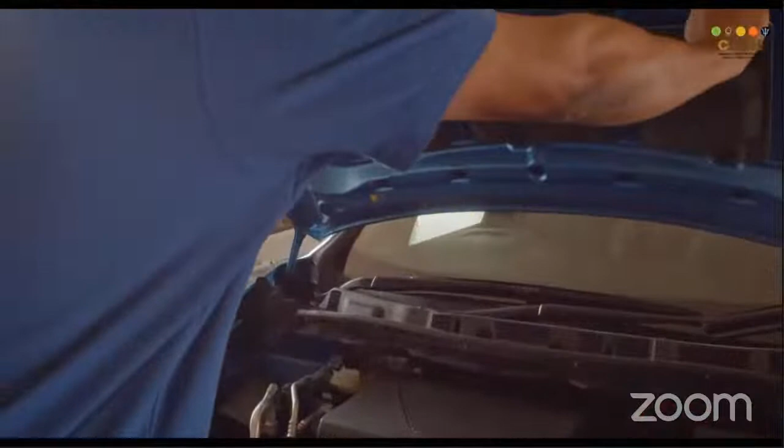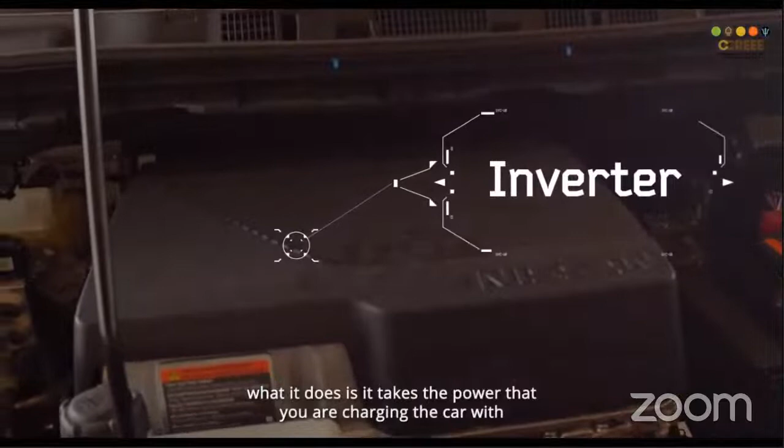Nothing changes for the vehicle from a hood standpoint, but this is a typical 12-volt battery. This battery operates your auxiliary systems - your radio, your dashboard lights, your headlights. What looks like an engine is actually a main feature of the car. It takes the power that you're charging the car with and converts it to DC, going from an AC supply into the battery. Then when it leaves the battery, it needs to become AC again to drive the motor. So a lot of the features in the car, compared to an ICE vehicle, are the same - it has a lot of good features.

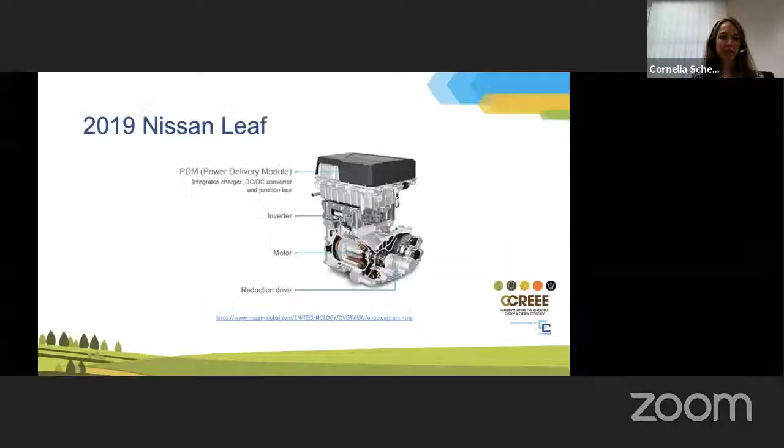You'll have seen where I lifted the hood of the car to show this part that looks like an engine in an internal combustion engine. This is a cutaway from a Nissan Leaf. The top part you'll see when you open the hood is the power delivery module, which integrates the charger, DC/DC converter, and junction box. Just below that is the inverter that normally feeds the motor - you can see the motor is right there, very compact, and it's connected to the shaft of the car wheel. It's a very innovative way to design the car as it relates to the features that propel it forward.

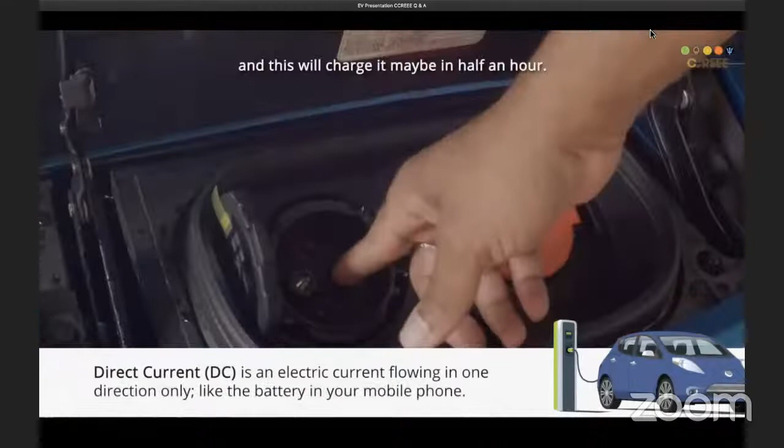Sure, I'm just going to do a little charge now, just top it up a bit. Right in your house - you can charge it right here? Yep, so I just open the latch of the cable. This one is a fast charge, which is direct current, and this will charge it in maybe half an hour. This is your AC port, from the household or from a public charge, and that will take a little longer to charge. This one is the one I'm going to be using.

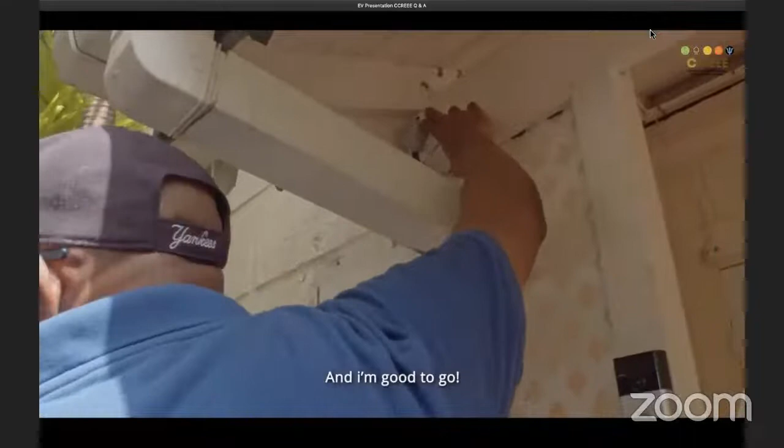This one takes how long compared to the... well, it depends on what type of charging infrastructure you're plugging into. If I have 20% to charge, just to top it up, it could take 8 hours. So while you're sleeping? Yeah, exactly. So here in a Barbadian context, do you have to adapt for that voltage? No, they just take the power from the panel and the electrician puts this 220 plug here. I plug it in, turn on my little panel switch, and I'm good to go. I go to bed, in the morning it's finished - take the cord off, put it inside, and I'm good to go.

And then I send it, and that's it.

In the office, we have a more advanced charger. For this particular charger, you have to have your own cable. Cables will come with the car, so you may have different cables for different cars—you'll definitely get one with the car. Once you get the cable, you'll need to know what your charging infrastructure is like, and decide if you need an adapter for that infrastructure in your country. You have the latch here, so we open the latch and then plug this in.

This particular charger is more sophisticated. It could charge as low as what you'd get at home and go up to at least 32 amps, giving it a faster charging rate. This charging station comes with a cable. This is a type 1, and this connection is a type 2. This one is typically US or Japan market, and this one is typically the European market.

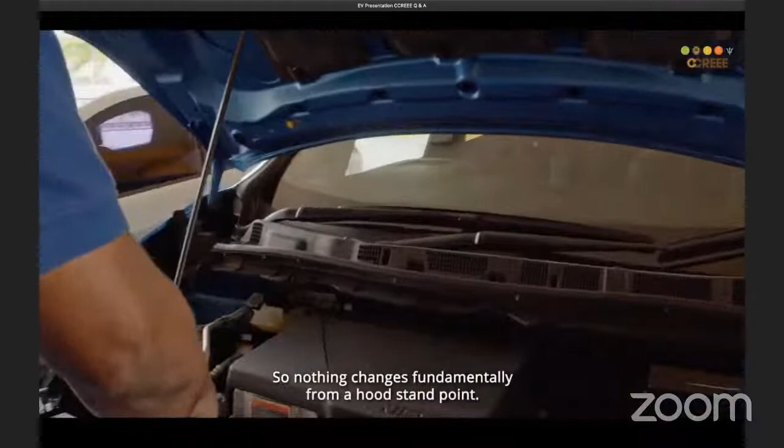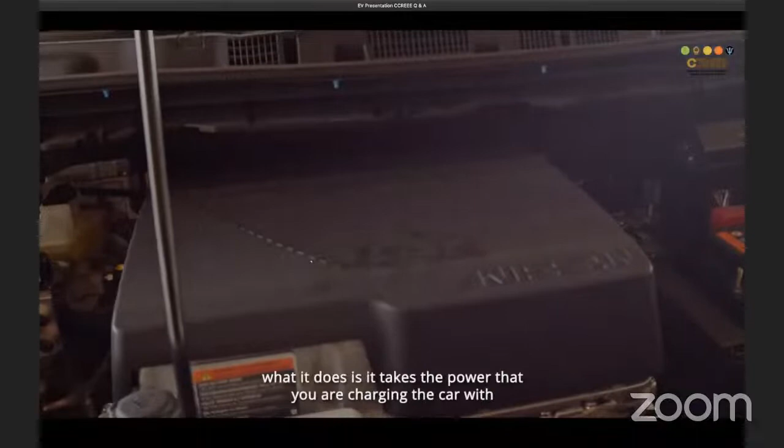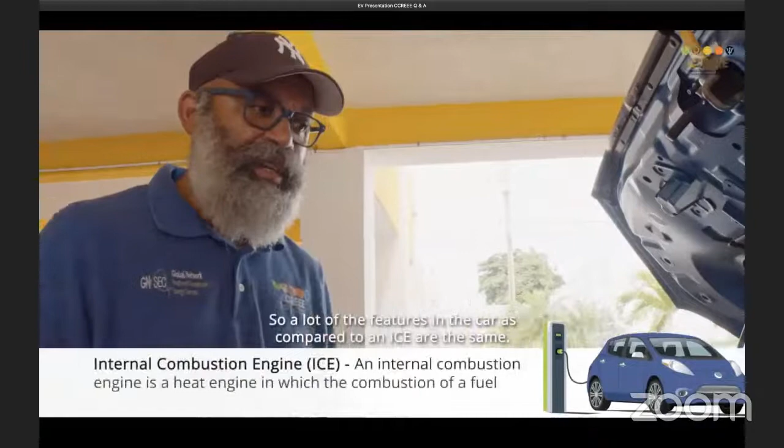Nothing changes for the vehicle from a hood standpoint. This is a typical 12-volt battery, and it operates your auxiliary systems—your radio, dashboard lights, headlights. What looks like an engine is actually a main feature of the car. It takes the power you're charging the car with and converts it to DC, taking it from an AC supply to get it into the batteries. Then when it leaves the battery, it needs to become AC again to drive the motor. So a lot of the features in the car, as it compares to ICE, are the same, with a lot of good features we'll see when we're driving.

Penny and I just had a conversation about the Nissan Leaf. Can you tell me how it compares to a regular internal combustion engine car in terms of efficiency and other technical aspects? One thing about the Leaf is it's like a normal car, but definitely more efficient—internal combustion engines give you about 25%, while electric vehicles give you about 70%.

What affects the range? Well, climate control. So if I was to turn the AC off, right, I'm now at 354. Oh, so I turn it back on, now back at 332.

Do the different driving modes affect the range as well? Yes, it will affect the range of course. You'll get enough regenerative braking driving in eco, as I'm doing now. This particular Leaf has a feature called e-pedal. What is that? It helps brake the car and provide regenerative braking—so now I'm not pressing the brake, and the car is going to come to a complete stop.

A 44.5 kilowatt-hour liquid-cooled lithium-ion battery pack powers the MG, giving a range in excess of 250 kilometers per charge. That's about 2 laps at least around Barbados. Also, being liquid-cooled, the battery pack is ideal for our humid and hot temperatures here in Barbados.

What we're seeing with the MG is a much larger battery pack than the vehicles we first brought in, like the Nissan Leaf. Originally the Nissan Leaf was a 24 kilowatt-hour battery pack. Nissan now makes a 62 kilowatt-hour battery pack, and that's the way manufacturers have moved with the technology, into bigger energy density and larger battery packs, giving more drive range for the customer.

The vehicle charges from the front, the flap opens up, you plug in, you lock the vehicle, and the charge instantly engages. The MG ZS comes with an overnight charger, meaning the vehicle will charge to full in 6 hours.

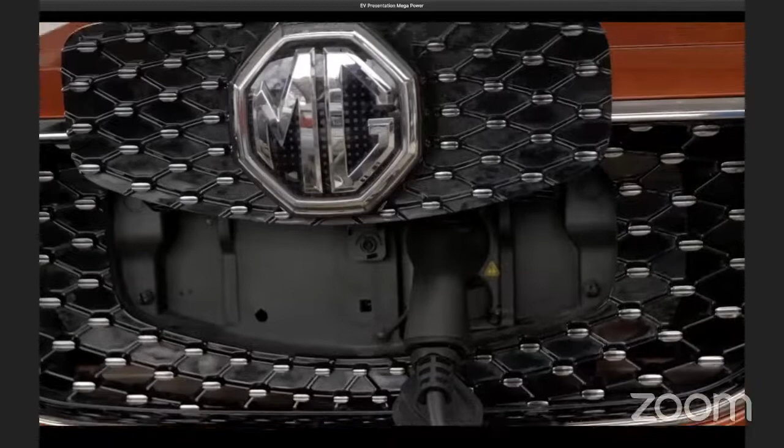When charging the MG, there are LED lights that light up the MG symbol, and it's glitzy. There's keyless entry, meaning that the keys can be in your pocket, in your bag, briefcase, handbag, or simply in your hand.

17-inch alloy wheels on the MG, along with windmill-style rims, in keeping with the renewable energy theme.

This is the MG ZS electric vehicle, with a 44.5 kilowatt-hour liquid-cooled lithium-ion battery. I will take you inside and demonstrate some of the features that it has.

To start the vehicle, it's push start. You put your foot on the brake and press the start button, and the vehicle is engaged to start. To put it in drive, you turn the toggle to the right. To put it in neutral, you turn it to the left once, and then turn it to the left again for reverse, and it shows you the reversing camera.

There are 3 silver buttons. The first one is the driving mode, so you can drive in eco, normal, or sport. The second is the level of regenerative braking, 1, 2, and 3, with 1 being the slightest level of regeneration and 3 being the heaviest. The most economical way to drive the car would be in eco mode, with regenerative braking at 3.

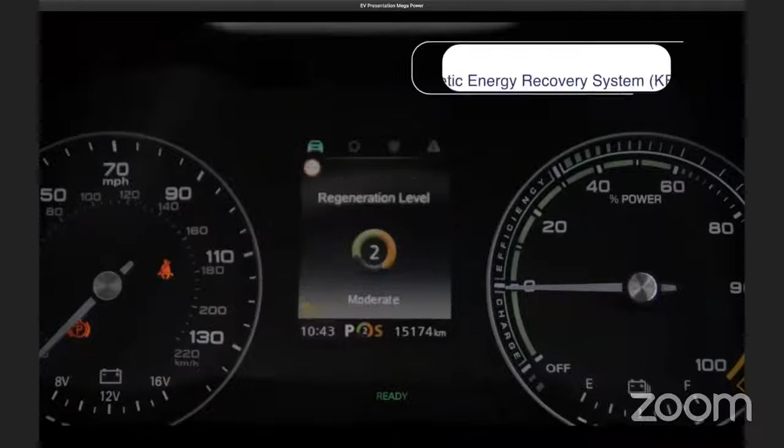When I press the cursor, currently it's at regenerative level 3. I press it down once, it shows you moderate regeneration level. And I press it down again, it shows you the least regenerative level, meaning you'll be putting the least amount of power back into the battery while driving.

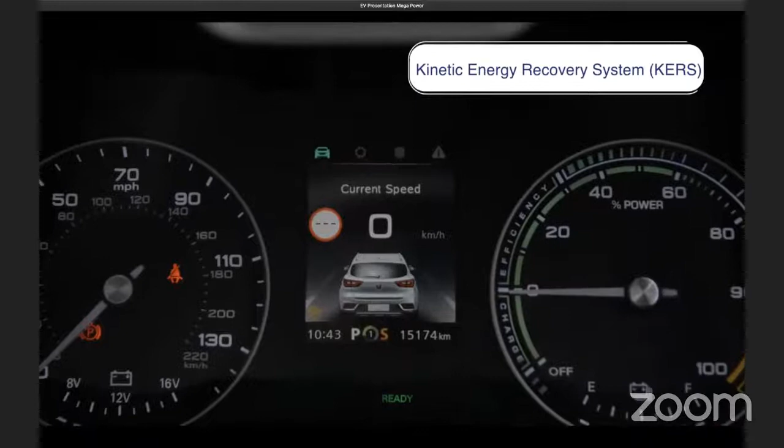The MG ZS comes with Apple CarPlay and Android Auto, meaning I can plug into Zoom, into my audiobooks, my maps come up on the screen, WhatsApp messaging. You can take calls by voice command note on the steering wheel.

The dash is currently showing the radio function. If you want your music to focus on the passenger side alone, it allows you to do that.

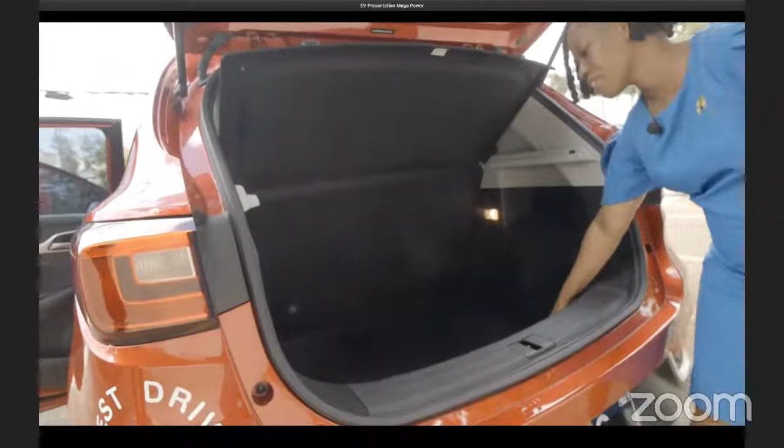For the trunk space, there are 2 levels. This one being the lower level. That's being the higher level. Underneath here, you can also store your charging leads.

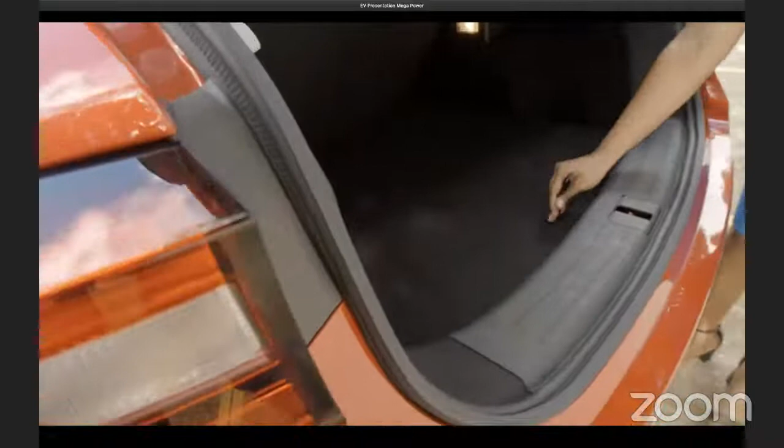Here is your charging lead for public network usage. It also comes with a puncture repair and a spare tire pressure function, so that you will not necessarily need to go to the gas station to put air into your tire. And this charging lead here is a UK 220 plug that you can have installed at your home as well.

We've rolled out a charging network at more than 35 locations across Barbados, and we will continue to put more chargers on that network. Vehicles such as the MG ZS, along with the Nissan Leaf, BMW i3, and other modern electric vehicles can all plug into this network.

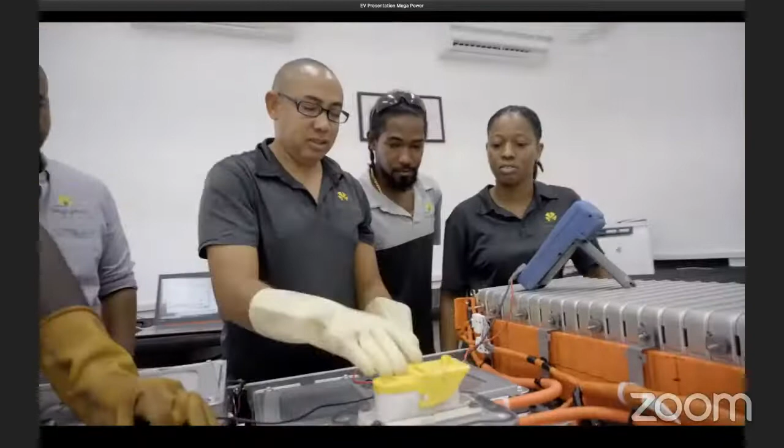What we've seen is incredible progress, incredible research and development and technological advancement since we started Megapower. We've seen greater energy density, larger battery packs, more range for the driver.

There are now over 500 electric vehicles on the road in Barbados, from cars to vans to SUVs to buses. And we're seeing great interest now across the region. This shows that the Caribbean region is now ready for electric vehicle uptake. We are ready to drive change.

These two videos now presented a good overview of the technology aspects of electric vehicles, the intelligence that can be derived by the drivers and owners of electric vehicles. And we would like to take this experience and jump into our question and answer session.

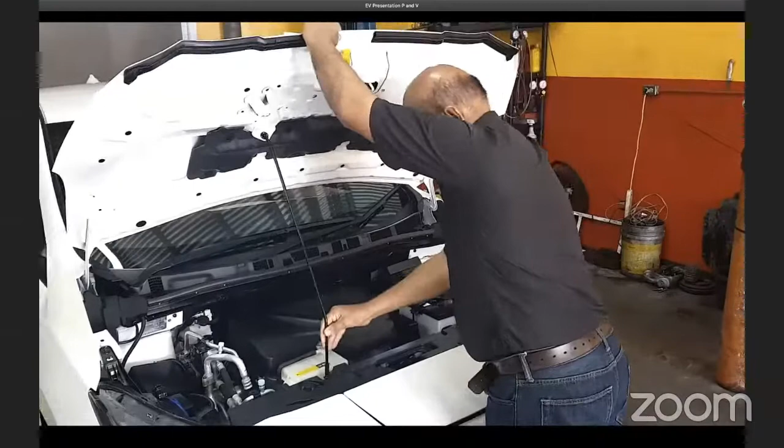We are now going to talk about the service and what is required to maintain an electric vehicle. This is the Leaf we have spoken about, and we are going to show you what you need to check and at what intervals. We have a 12-point check here, which is the manufacturer's specification, so we don't want to move away from this because we have to go with what the manufacturer specifies. First on the list is to inspect the 12-volt battery, check the connections, the cables, check the voltage and everything with the 12-volt battery.

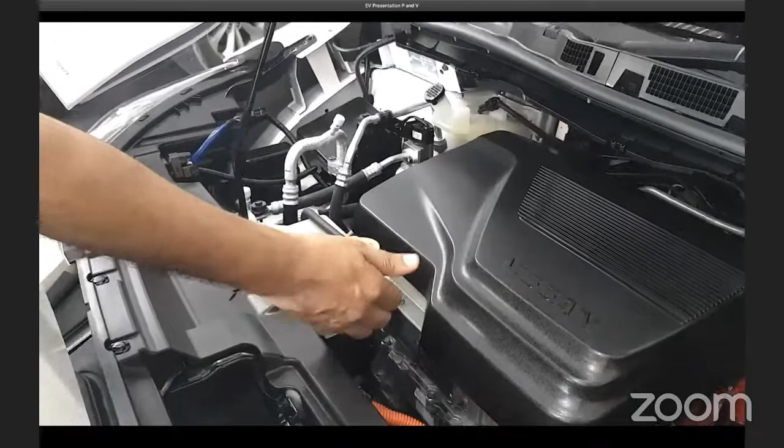The second thing we are going to check is the brake fluid. We make sure the brake fluid level is correct and check the color of the brake fluid, which would indicate if the brake fluid needs changing. So you check the brake fluid to make sure it is at the optimum level and the color is good. The third is the coolant. Now these vehicles don't really require coolant to cool the battery or the engine as such. The coolant is there just to cool the motor, which does not generate too much heat, but you must check the coolant to make sure it is up to maximum level.

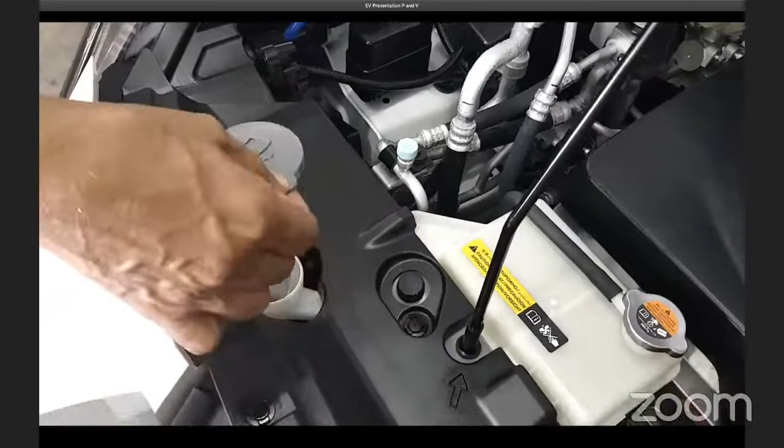Fourth would be the windscreen wash. This is very important because of the conditions of the road. You need to check your windscreen washer to make sure the water is up to optimum level.

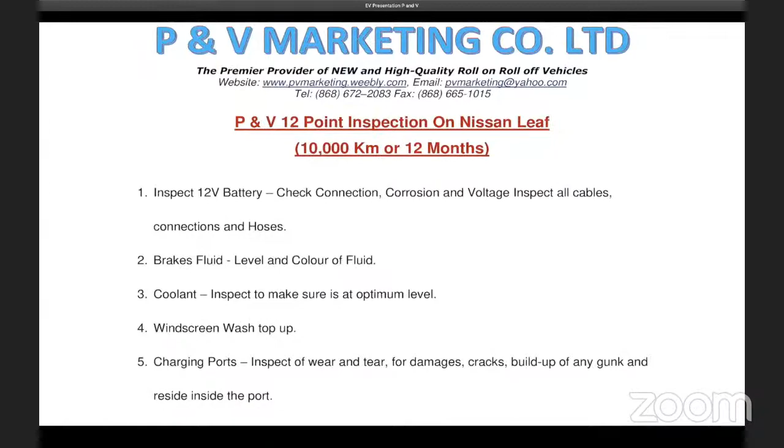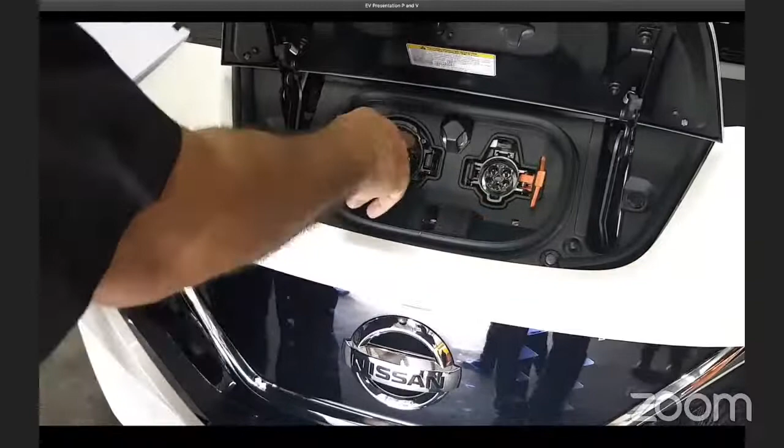The charging ports are extremely important. You need to check them to make sure there are no gunks, no buildup of dust, no cracks or holes that would let water seep in, because this is the charging port for the vehicle. You have two charging ports here, a level 1 and a level 2. Most people use the level 1 to get a trickle charge. If you have a type 2 charger, then you would be using the type 2. So make sure these ports are cleaned at all times.

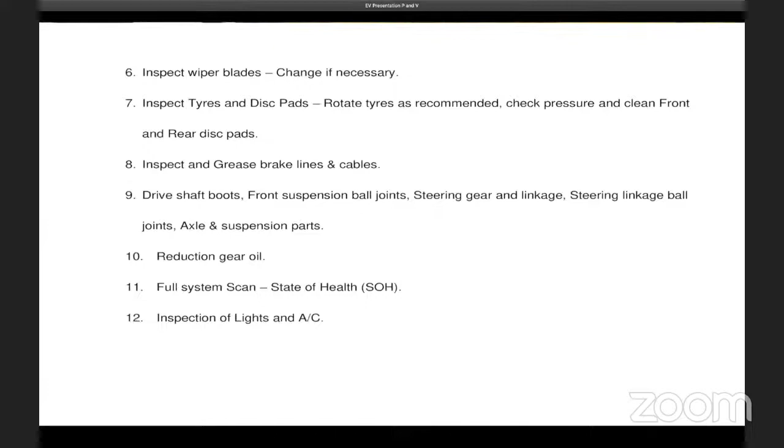We shall move on to number 6 on the list, which is the inspection of the wiper blades. You inspect and change if necessary. In Trinidad, people take rather long to change their wiper blades. This should be done maybe every 6 or 8 months. In cold countries, they do it twice a year, but in Trinidad it could be done every 8 months.

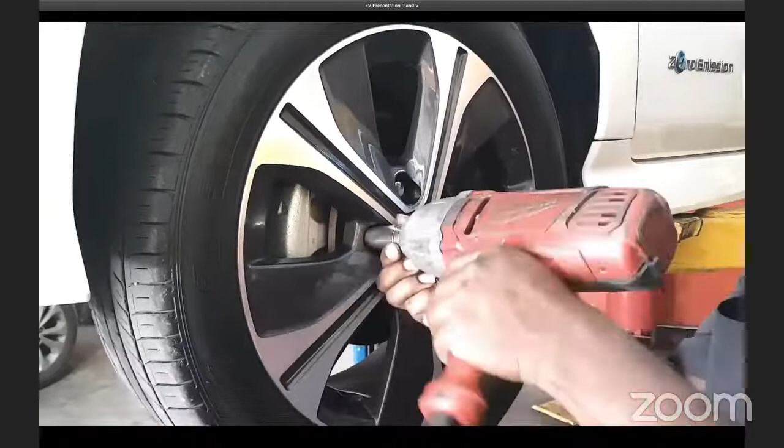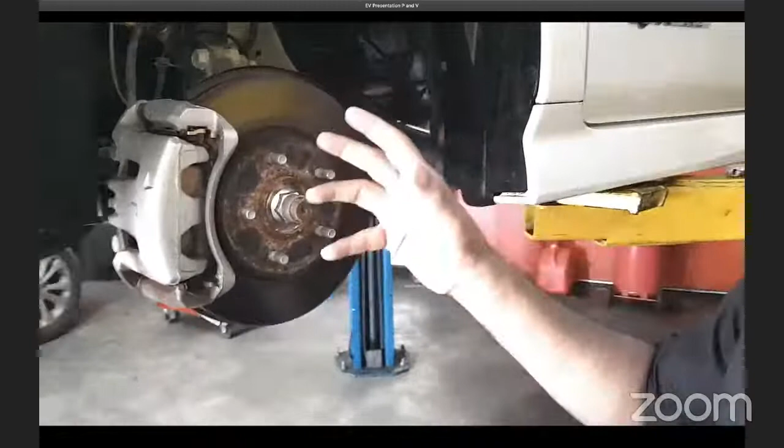We move on to number 7 now. We are going to check the caliper and brake pad. You're going to take the brake pad out, have the caliper cleaned, have the brake pad cleaned. You're also going to grease the pins, make sure the shim and everything is clean, so the brakes would be working to an optimum level.

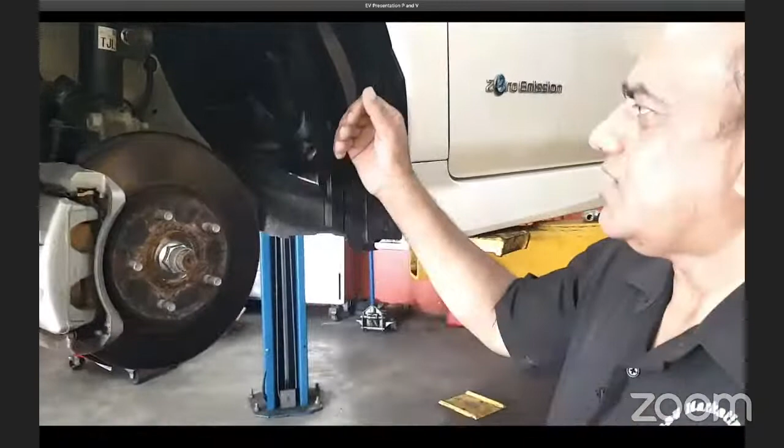Then you will have to check the boots, the drive shaft boots, and all the boots, the suspension, all the links, axle, and everything that operates the suspension. You check the strut to see if there's any leak or anything abnormal with it. Although it's an electric car, it still has a conventional suspension, so you must have the suspension checked at regular intervals.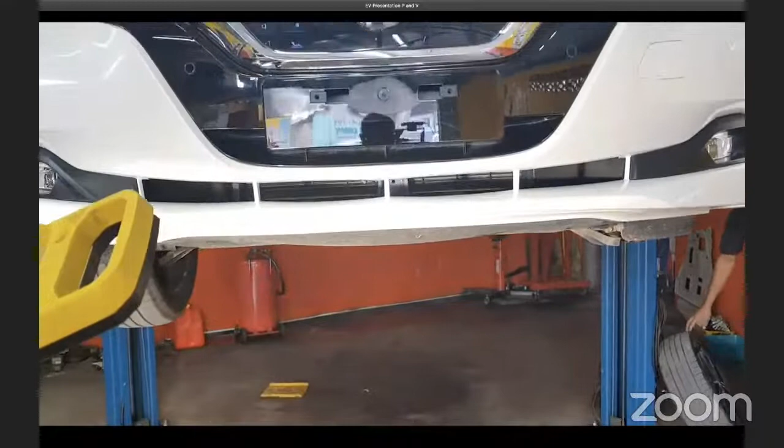We shall make sure and check the drive shaft or the axle, as they would call it. The boots, make sure they are not leaking and not damaged, and check the other links. Also you can check the ball joints and everything under the vehicle again.

Then you can check for the reduction oil. If you have to drain the oil, this is the drain plug and this is the fill plug. It does not require changing this oil regularly, it will last very, very long. So you just inspect it to make sure there are no leaks or anything that will damage the reduction gear in the system there.

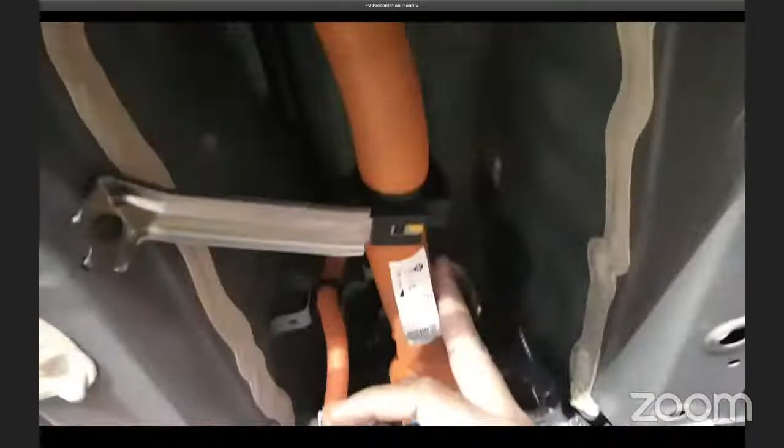When you're finished there, then you'll check all the wirings. Of course, all the wires that have a salmon cable in it are live cables. This is the main cable that goes into the battery, and the battery is located to the bottom of the car here. You'll have to make sure that these connections are not slack or corroded in any way, just to make sure the vehicle will operate to optimum level.

Another part of the inspection, whenever you go to have your car inspected, you have to make sure and have the lights inspected. Make sure the bulbs are working, the lens are not damaged, they are cleaned and in proper working condition.

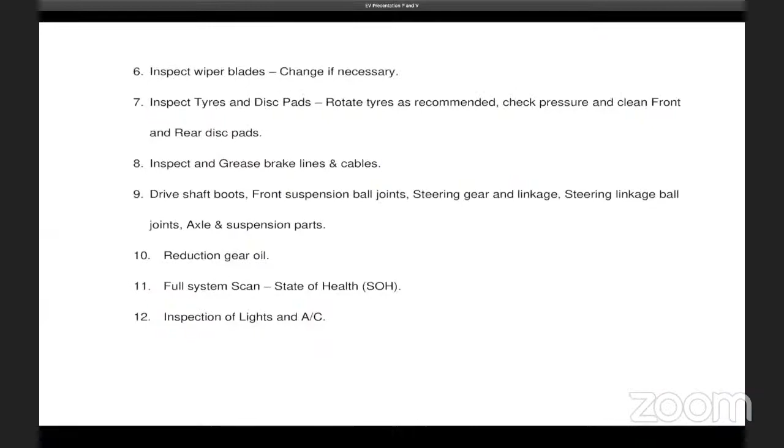When you are maintaining and servicing an electric vehicle, you must have the proper equipment to deal with this vehicle, because this is a high voltage vehicle. So you could be electrocuted and it could even be fatal. Bear in mind that anybody cannot interfere with these vehicles. You must be trained, and to be able to repair this vehicle, you must have some knowledge of electrical works and mechanical works.

With that in mind, I shall say that when people hear about a hybrid or electric vehicle, they get scared. Some people get excited. But with this vehicle, the savings are great because they don't have a combustion engine. With the absence of a combustion engine, you don't have a lot of the parts. You don't have oil filters, belts, you have no fuel tank, fuel lines, or fuel pump. You don't have hoses or lines, all these things you don't have. So the savings that you will get from these vehicles would be phenomenal.

Because you don't have to go to a gas station and put liquid fuel, you'll only be using electricity, which you could charge from your home, or if there are charging points, you could also charge from the grid. The savings with an electric car are great.

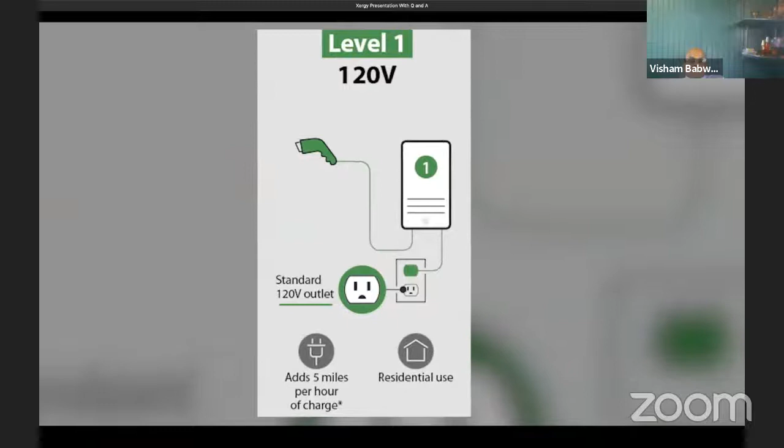Let's talk about the 3 levels of EV charging and how we can calculate recharge times. Level 1 is usually called portable charging because you'll use a portable cord that comes with your EV and plug it into any standard outlet. This is the slowest way to recharge an EV.

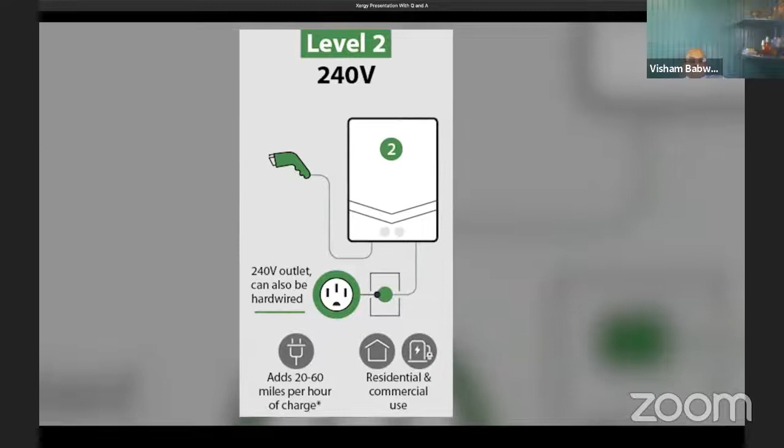Level 2 is usually called fast charging. It can be done by a heavy-duty portable cord, or more commonly, using a fast charging station. It will connect to the grid by way of a higher voltage and higher current circuit installed specifically for its use. This circuit is comparable to that of an electric clothes drying machine.

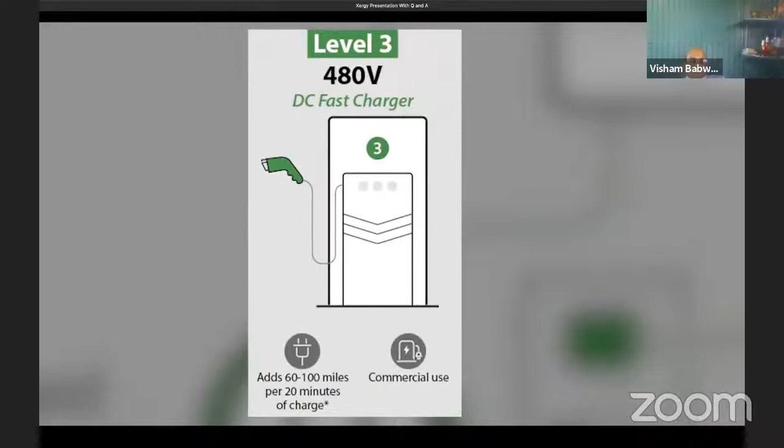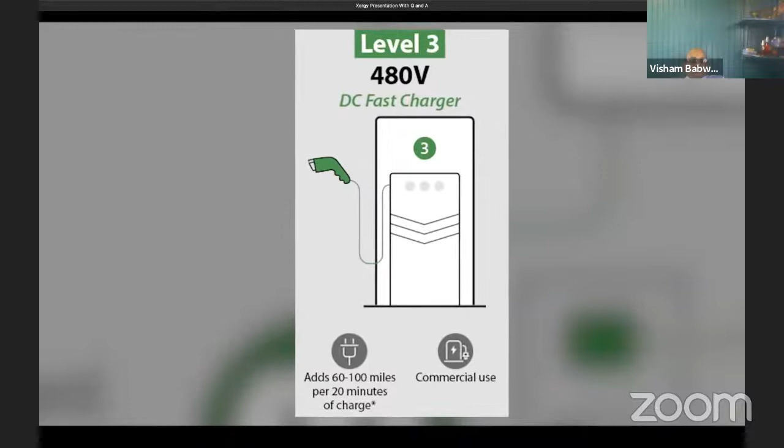Level 3 is usually referred to as rapid charging. These are heavy-duty charging stations that operate using DC power rather than the AC power found in level 1 and level 2 charging infrastructure. They connect to commercial grade voltage and current circuits that require in-depth installation and experience. These chargers are usually found near highways, busy central districts, airports, and major destinations.

Now, recharging depends on both the EV charger as well as the EV itself. Think of the EV as being able to pull power and the charger as being able to push. When an EV is first plugged into a charger, the two devices will communicate with one another to see which of the two is the slowest and then agree to charge at that rate. The recharge rate is usually specified in kilowatts of power.

The amount of time needed to recharge a battery will be a function of both that power rating and how much energy the battery needs to be full. One thing to note is that most new EVs will be able to accept level 2 and level 3 charging at different rates. Let's look at an example.

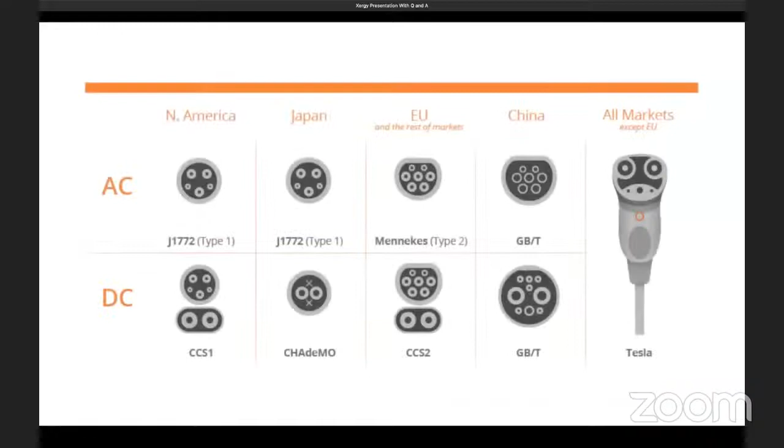In addition to EV charging speeds, there are also different plug types, similar to electricity outlets. Just like outlets, different plug types are associated with different countries of origin. In the Caribbean, being a primarily right-hand drive market, most new EVs will either have a European or Japanese plug standard. Okay, after looking at those numbers and plug types, let's go take a look at EV charging in action.

Let's start by looking at a level 1 portable EV charger. This mobile connector came with my EV and can be plugged into any standard outlet. Here it is in my garage, with one end in the outlet and the other end plugged into my EV. Let's take a look at how fast the car is charging.

So we are pulling approximately 115 volts at 12 amps, or roughly 1.38 kilowatts of power. For this EV, that translates to around 8 kilometers per hour of charging. If my EV is parked at home for 10 hours a day, then I can recharge roughly 80 kilometers of range every night. If my daily commute is less than this, then level 1 charging is suitable for my day-to-day needs.

Do note, level 1 charging is not suitable for my daily driving needs. And so, I installed an additional 240 volt circuit in my garage that can give myself level 2 charging speeds on a regular basis. This level 1 travel cord will stay in my EV, so if I'm ever on a long trip to visit family or friends, I can grab a quick charge overnight if I need it.

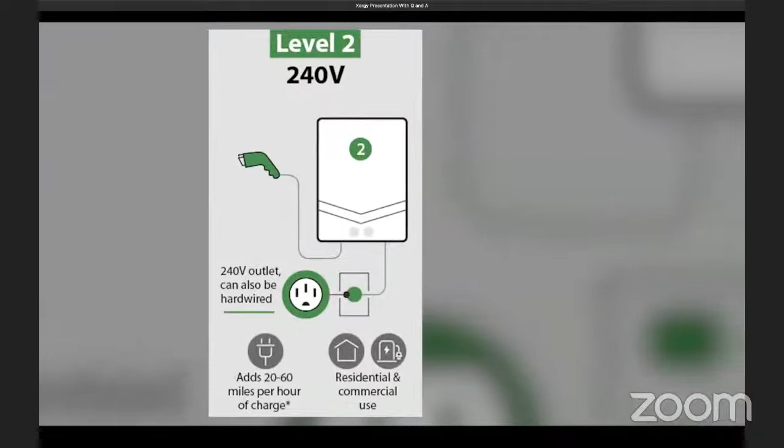The 240 volt level 2 charger is typical for most EV drivers, but let's visit our office to see level 2 charging in action. This is Xergy's main office charger, or as it is commonly referred to, a quick charger. This is a quick charger for tenants of this building, and as such, runs on intelligent software that can do billing, collect usage data, and grant special access to the charger separate from the public.

Let's try using it like a member of the general public. I simply log into my mobile charging application on my phone and request authorization, i.e. pay, to unlock the charging service. I then plug into the car and voila, I'm charging.

Note that this charger is billing me for every minute my EV is connected to the charger. Your individual public charging rate may vary by price or may charge you by kilowatt hour. This station is much quicker than a level 1 portable cord. It is pulling 30 amps at 208 volts or approximately 6.24 kilowatts of power and is charging at 40 kilometers per hour. This is around the same speed as my level 2 charger at home.

Now, let's visit a rapid charger. We are in Etobicoke, Ontario, checking out Tesla's supercharging network, which can give us rapid recharging speeds even faster than our office charger. It is very rare that I use these stations, but it is very useful for those occasional long trips. I simply walk up to the charger, detach the plug, and connect it to my charging port.